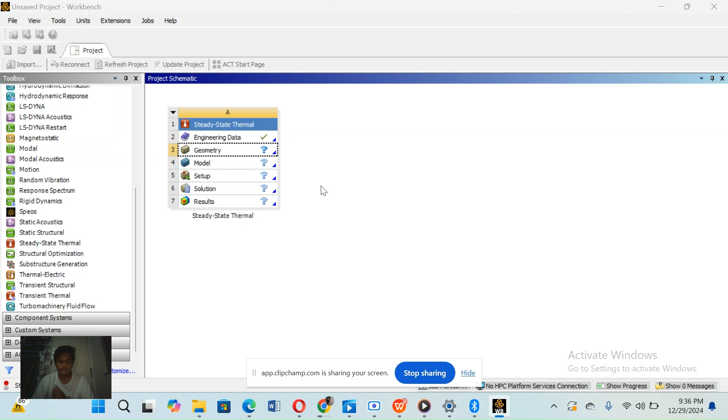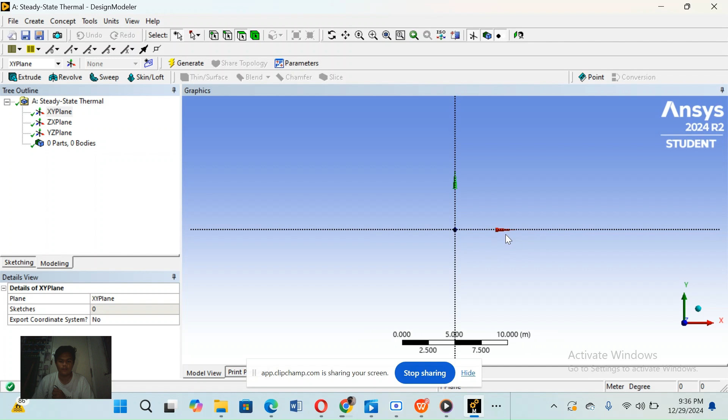Next, click XY plane and click face, so in this case we can now draw the object. Click sketching, rectangle, click to the center point and drag, estimate, and then dimension. This must be in general.

Click and drag, change the dimension. The given is 1 meter by 1 meter. Then click generate.

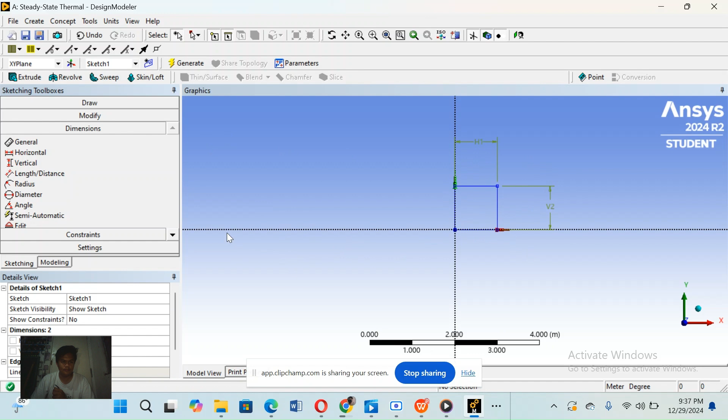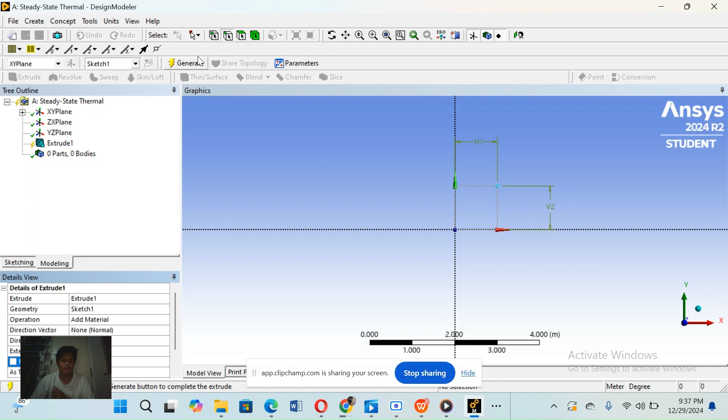Next, click extrude, apply. Since my attendance number is 12, it would be 20%, and 1.5 times 0.2 gives us 0.3 meter. Generate. So we can now create the first object.

So next we will apply the next object. We need to click face, click the surface area, then go back to sketching, click face, and draw an additional rectangle.

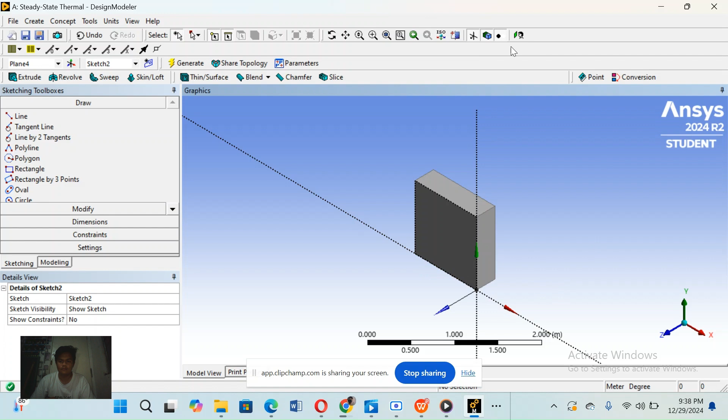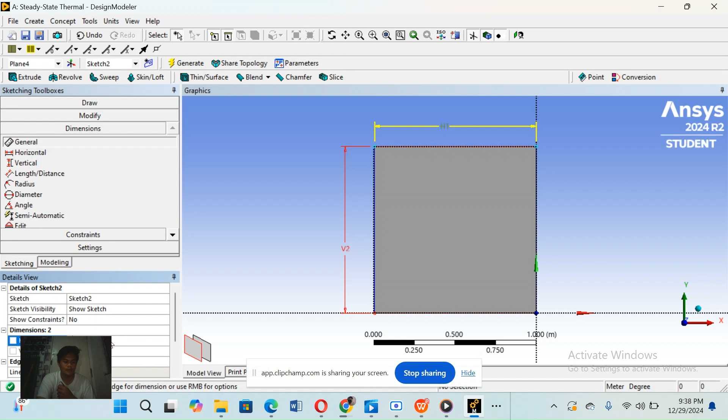Just to make sure it's even, let's double check the dimension. It should be 1 by 1. So change this to 1 and then generate.

So we already have the rectangle, and next we will make it 3D as well. Click extrude, apply, add material, add the frozen material, and then 1.5 minus 0.3 is 1.2. Generate.

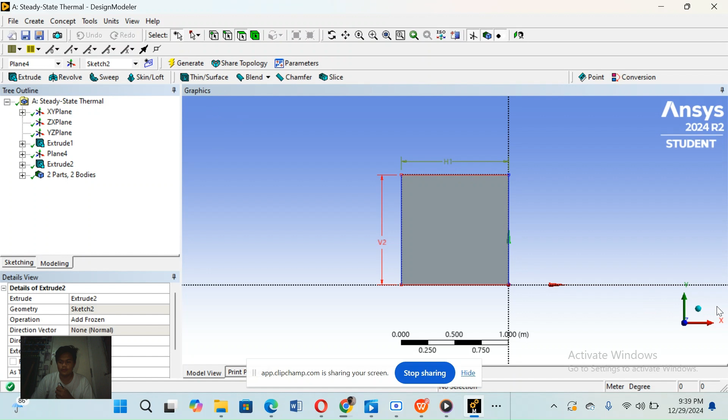Let's double check. Okay, and this should be in solid also. Just click solid.

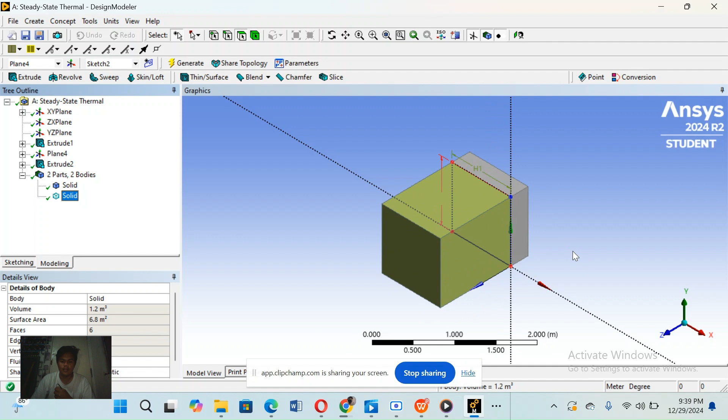Next, we will set up the temperature and total flux. So go back to the front page of ANSYS and double click model.

There, so now we have our model. The first thing to do is click the mesh on the object, right click, and then generate mesh.

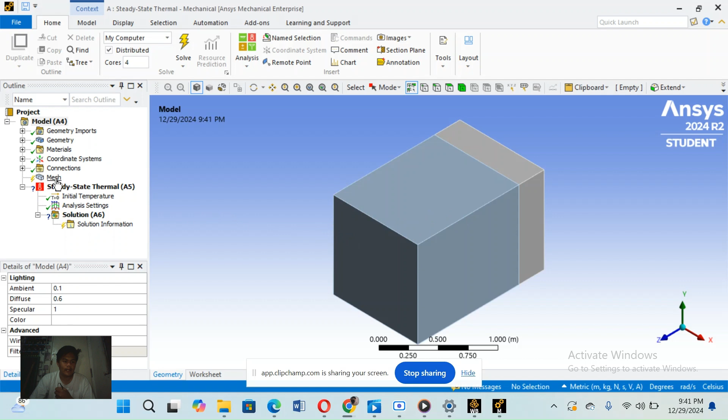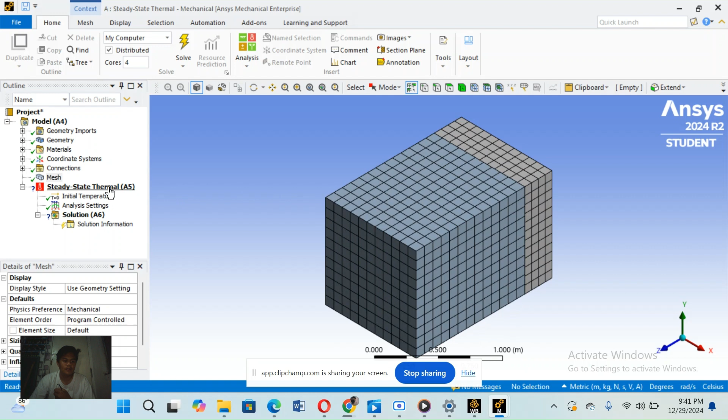Next is to add the normal or the temperature given. Let's insert a temperature. Click this face. The given is 25 degrees Celsius. Okay, generate.

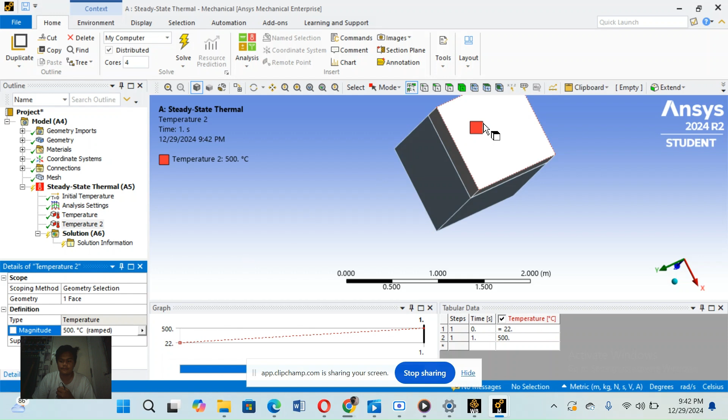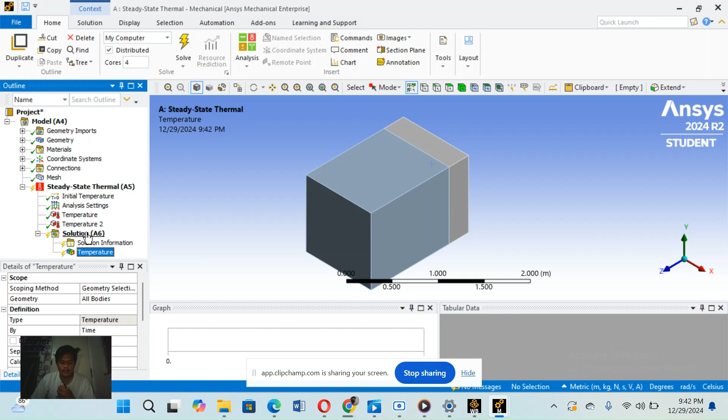Now we have two temperatures set. Next thing to do is to add temperature and then total heat flux. So just right click solution, insert thermal, add input temperature, and then next, total heat flux.

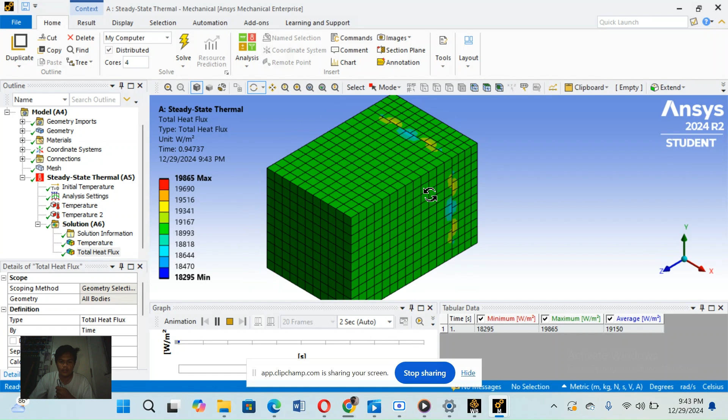Okay, so the total heat flux has been generated. Let's play it. There, total heat flux. Now let's double check the temperature. Temperature is working. Okay, it's working.